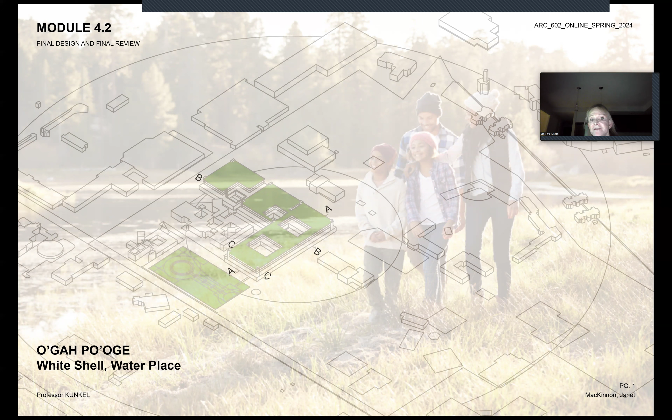My project is about families, children, nature, parks, as well as social equity, climate change, all those wonderful things. And it began with the Midtown Community Development Plan, which mapped out all of the issues that we needed to be concerned about.

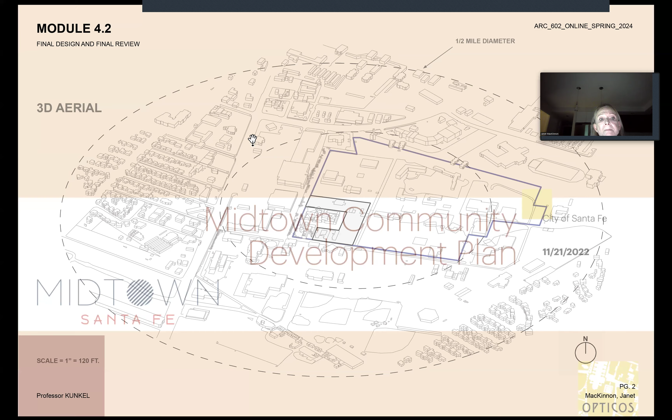I was able to create a community-oriented housing project with 5 playgrounds and 72 units, 93,000 square feet of housing units, plus the community level.

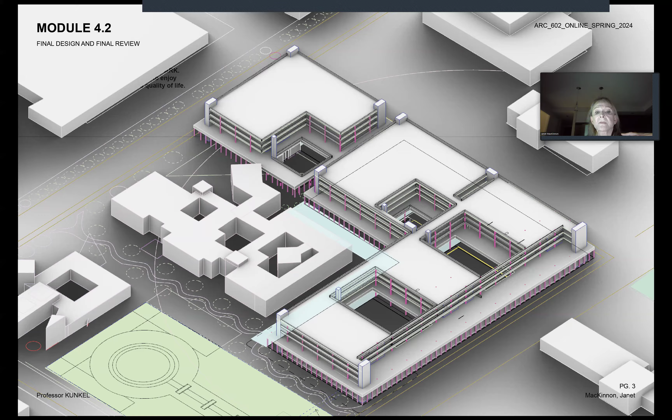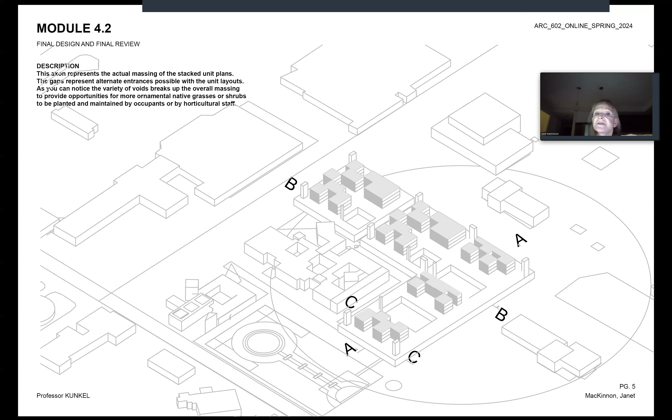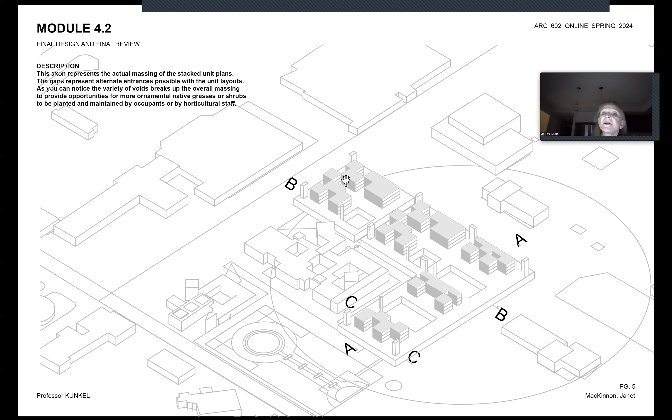It started out with some massing studies that were kind of three levels in one. This is the massing axon. This is the unit plan axon, which shows the same forms, but the combination of all the units that were put together, whether it was a studio with a 1-bedroom, studio with a 2-bedroom, studio with a 3-bedroom, whatever the combinations were, I tried as many as possible.

But it was all about the children and the freedom, kindness, listening, respect, trust, destiny, faith, learning, participating, and being at risk. And I think being at risk is the major element for children's agency, where when a child is at risk, they know their limits of their abilities. And this is an important stage of development that needs to happen.

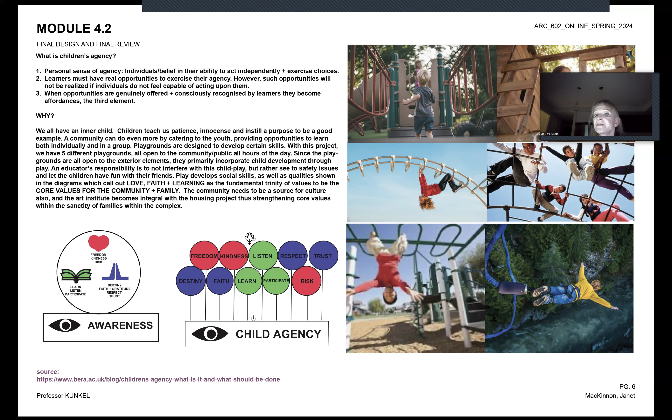So the playgrounds are areas that are meant to play with this idea. I have not designed them yet, or I'd love to, but did not design them. There are other people that do that much better. But I loved the idea that one could build the playgrounds together with the children.

So all playground structures will be built by dads with the kids. Ownership must be offered with the initiation of the community housing development, rent to own. It's a very important element.

So my project is over 5 acres. And there was a goal to get as many units as I possibly could. I was able to achieve 72 units and a total of 144,000 square feet gross for the community center space.

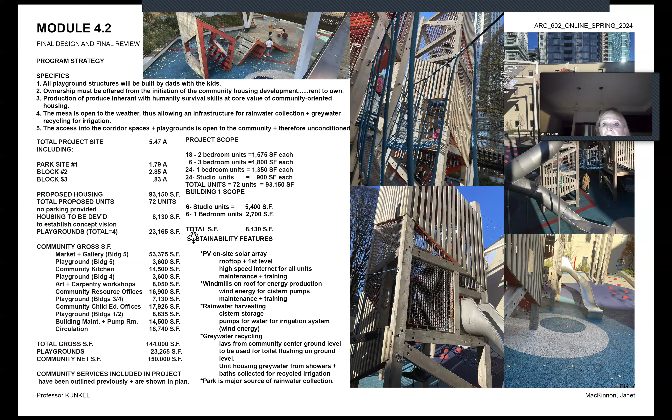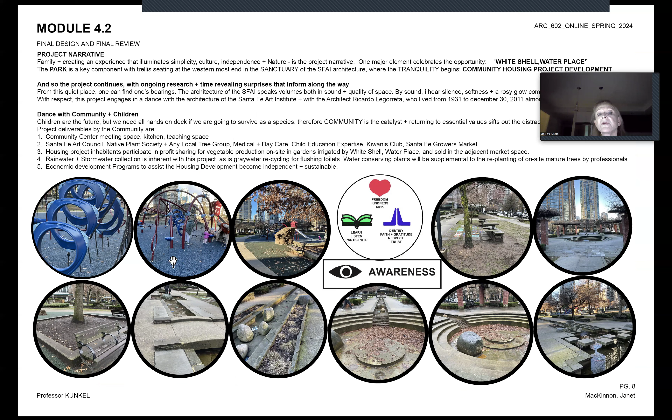The main structure with the park, as I said, I feel they're endangered. So I really wanted to have the park as a family space with playgrounds, as well as having a very spacious living space for both the studios, the 1-bedroom, the 2-bedroom, and the 3-bedroom.

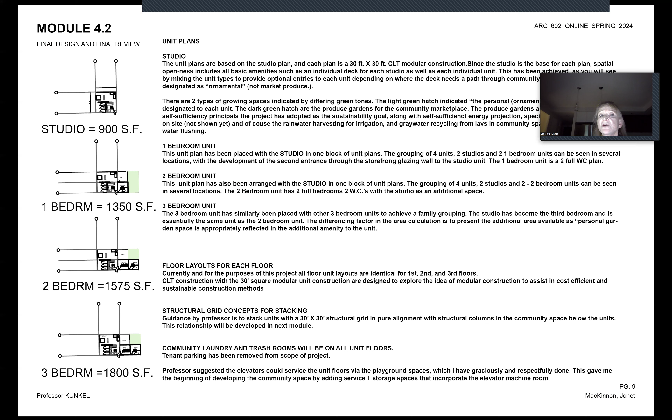So it was based on the modularity that would be required with CLT. I wanted to explore CLT. So all of the units are based on that 30-foot square module. And I have a combination of 9-foot ceilings and 8-foot ceilings. And openness. Same finish in the floors, same finish in the ceilings, a lot of storefronts.

And of course, we have the architecture of Ricardo Legorreta, who I find quite enjoyable. And I think it's a marvelous opportunity to have these two structures embedded in my project.

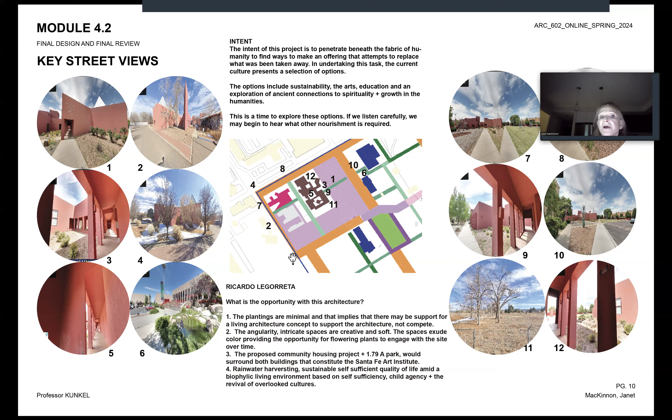My approach to Ricardo Legorreta was to dance with him with plants, basically, native plants. So I have a lot of plants on the roof, and the roof is all nature.

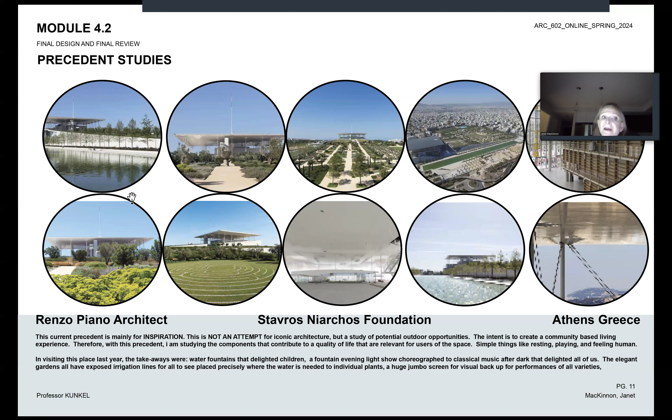My precedent was Renzo Piano. I had many, actually. This is the last of the precedents, which was to experience the amenities of outdoors and see this beautiful water feature and how these were expressed and enjoyed by the participants. And I wanted to understand that a bit more. I was also a bit surprised to learn that the roof is a photovoltaic generation plant.

But back to the Midtown Community Development Plan, it had a high emphasis on water, which I picked up for the rainwater collection and the gray water recycling. It's a lot of area for gathering of water.

I also had the project oriented with the wind to create a very protected area for the entrance into the project. So all of the playgrounds are accessible after hours.

And the living roof has windmills to help pull the water from the cisterns that are embedded in the foundation. The solar panels would be the generation for the project as well, so the idea is that the project is self-sufficient with the park.

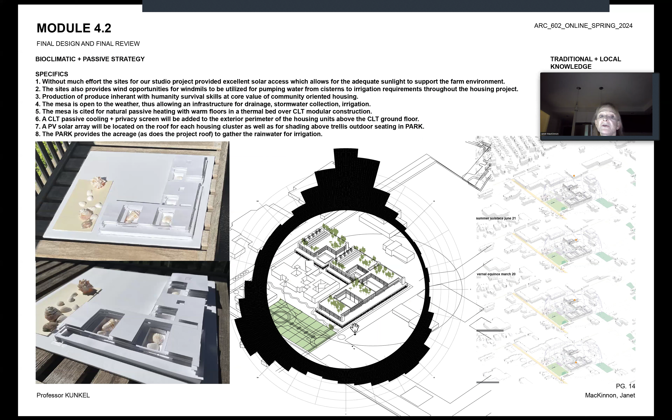Oh, and I made a model that brought me to the point where I needed to cut away the plans above so that there was enough sunlight to assist in the growing of the food production that's going on in this community as well.

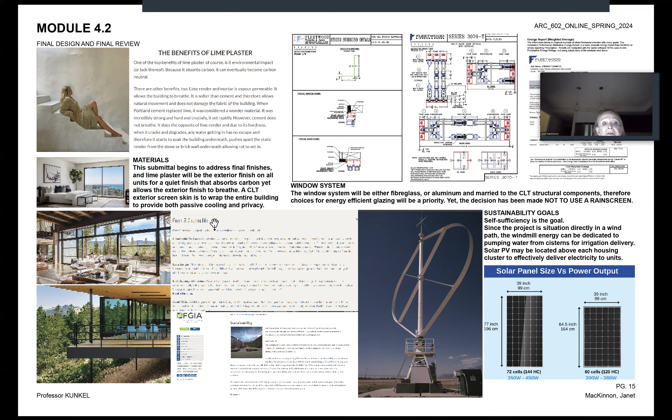In terms of finishes, I kept it simple and clean. We have lime plaster as the exterior finish, and I just learned that it takes a couple of months to cure, which is good to know. But we have storefront systems and just a simple space.

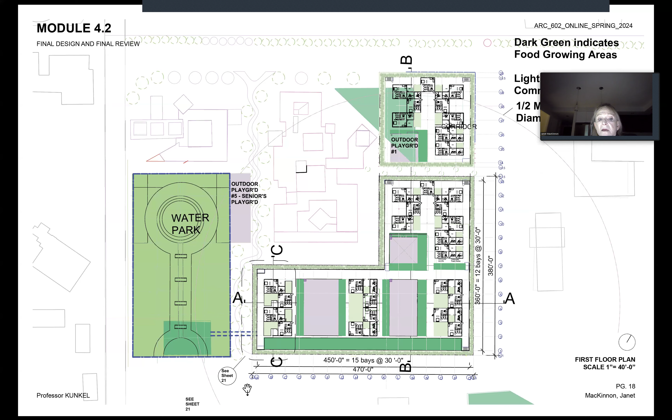This is the building that I was to develop because the whole thing is too big. This is the growing area for the project shown in dark green. The light green are ornamental landscaping places to accent the housing units. This is where the project was cut away so that the sun can get to the growing areas.

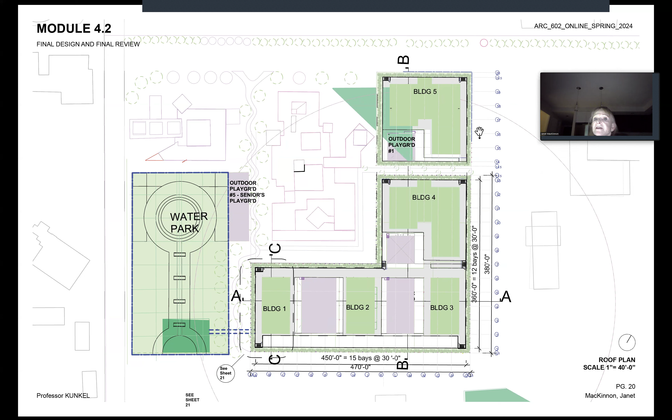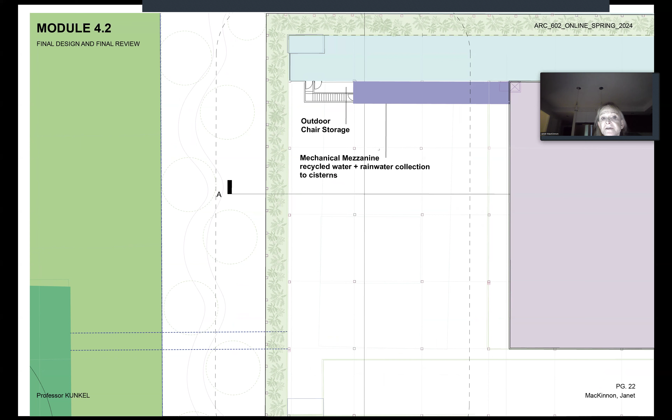And as I develop these, now there's no scale to these, but this is 1/8 inch scale, and this is the lower level with stairs going up to this interstitial mechanical space that is meant to help organize all of the plumbing, the rainwater collection, and irrigation feeds, as well as the gray water.

These are the unit plans that are above and similar. Each floor has the similar layout. And this is the second and third floor with the cutaways.

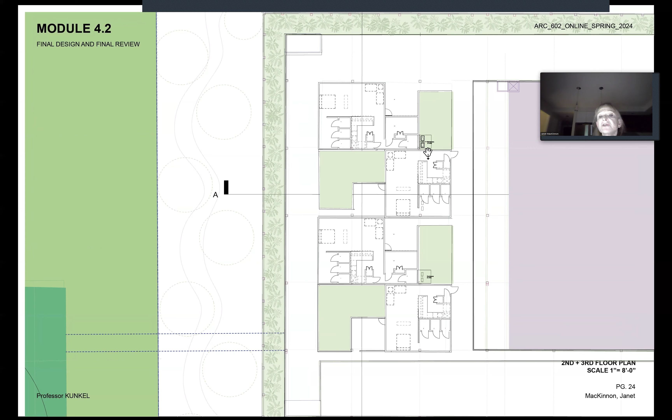And you can see that the condensers are grouped in groupings of 2, so that for each of the units, the mini split system condensers are located close to the units. This is the roof plan again.

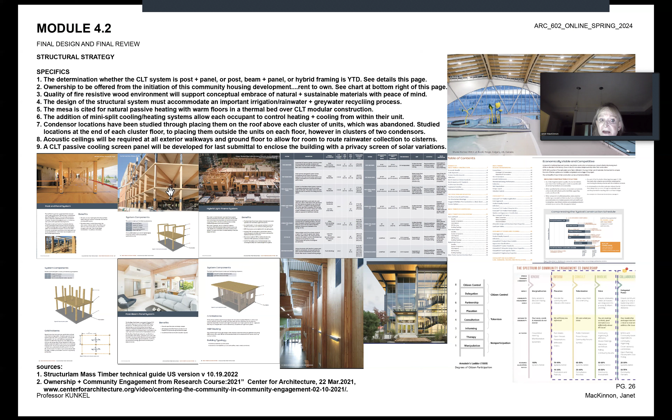CLT is my structural system. I'm not sure whether it's a post and panel system or a post beam and panel system or a hybrid. It probably will be a post beam and panel system. My research paper was on CLT. I learned a lot about it, and I didn't have time to design the entire structure.

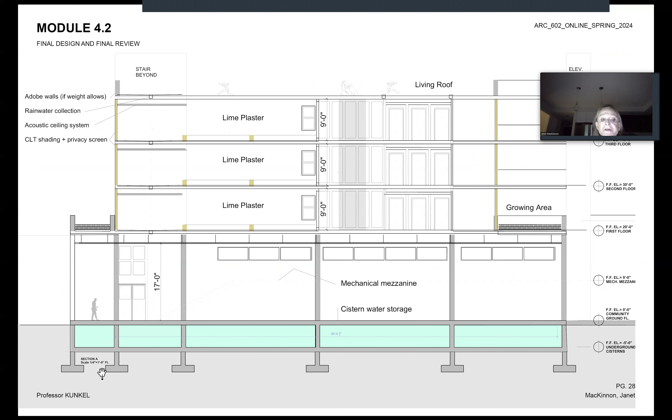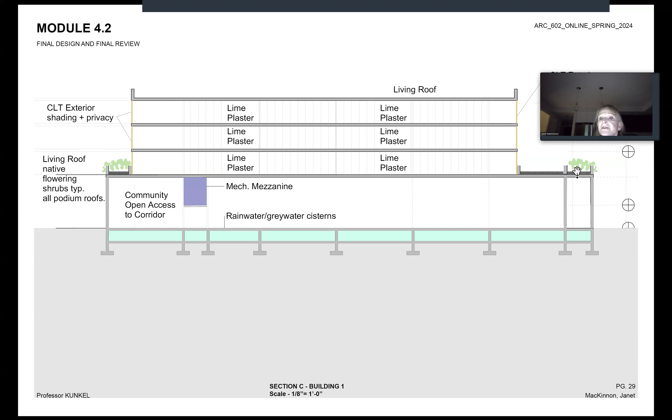However, I did decide that the cisterns would be in the foundation and on site. And this is a 1/4 inch scale section. And this is a 1/8 inch section showing the living roofs on either side and the growing areas.

The windmills are going to pull the water up from the cisterns and help with irrigation for all the plants. The solar panels will provide power for my self-sufficient community, and I have enjoyed this experience so much.